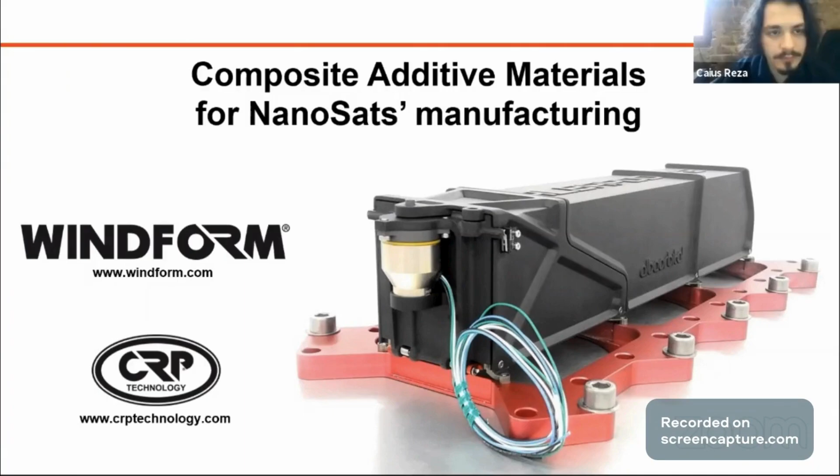We've been working, I would say almost 1 year, with them in order to develop the AlbaPod, and it's been a really cool experience. A lot of things we've learned from both of our companies and from this product. You can see this really cool picture about the AlbaPod when it was on the testing phase.

Let me present my company. The company is CRP, a group of companies made of 4 different companies which do complementary things, except for Energica which you'll see last. CRP Meccanica is a company specialized in precision CNC machining, doing really good work on aluminum and titanium parts, with more than 50 years of experience in this field.

Then we have CRP Technology, which has 25 years of experience in 3D printing, especially SLS technology, with their own materials called Windform. CRP USA is a sister company of CRP Technology, based in the US to serve the North American market. And finally, there's a spin-off from our background in motorsports and motorcycles.

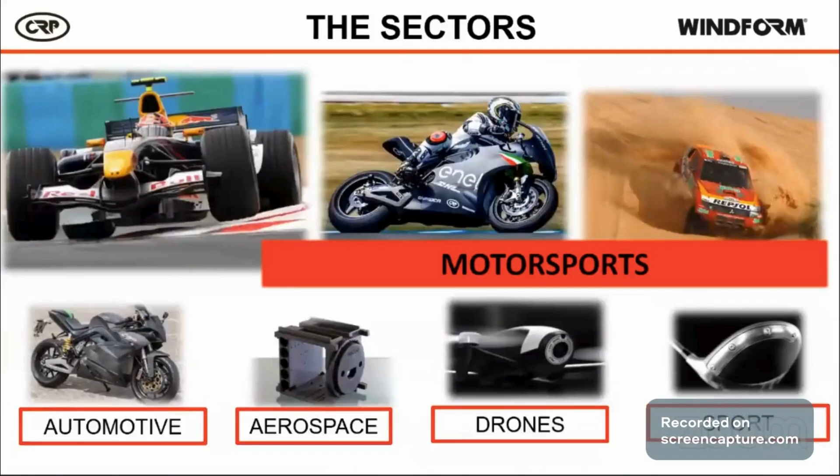The industries we work in mainly are motorsports, but as some might say, a Formula One car is just a plane upside down. So that's our link with aerospace, especially with planes, and then with satellites and everything that flies.

So it's a very near expertise that we've developed in motorsport that we can apply also in aerospace.

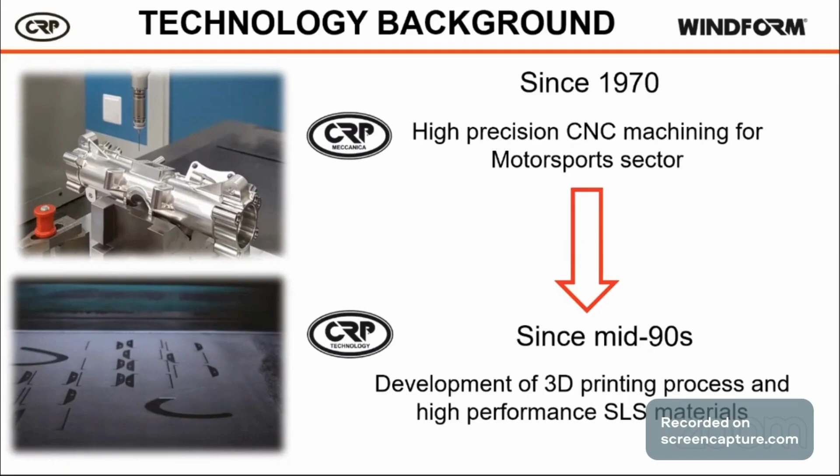Our background: we started in the 1970s with high precision CNC machining for the motorsports industry. In the mid 90s, we bought the first SLS machine in Italy at the same time as Fiat Centro Ricerche, and we started developing not only 3D printed parts, but also working on how to improve the materials that were actually in the market at that time, and started developing our own range of materials.

It was only in 2005 when we developed this line of materials, this family called Windform, especially Windform XT, which is a carbon fiber reinforced polyamide, a really, really good material for structural applications.

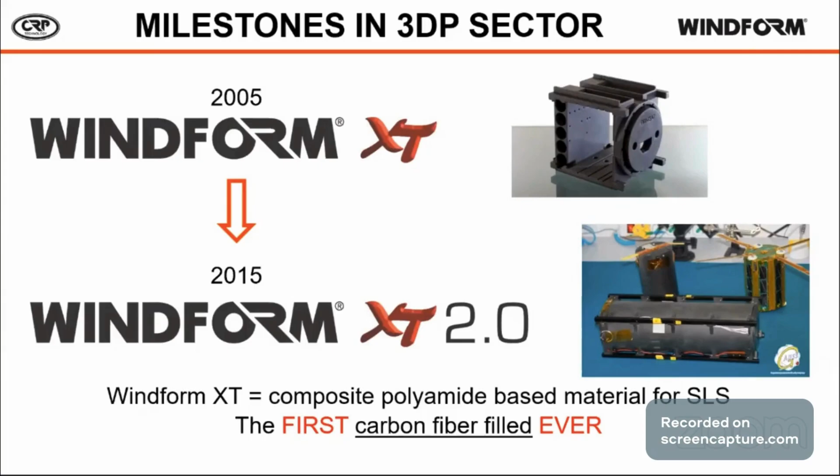In 2015, we updated our Windform material with higher strength and higher rigidity in order to improve the applications we were already working with. It's considered that XT was the first carbon fiber material for SLS technology ever developed.

We started doing rapid prototyping for the wind tunnel. Now with the improvement of 3D printing and the materials, we don't say anymore that we're doing rapid prototyping, but we are doing additive manufacturing, which is a whole new technology to do functional parts, not just parts that can be kind of what you expect from traditional technologies, but fully functional parts.

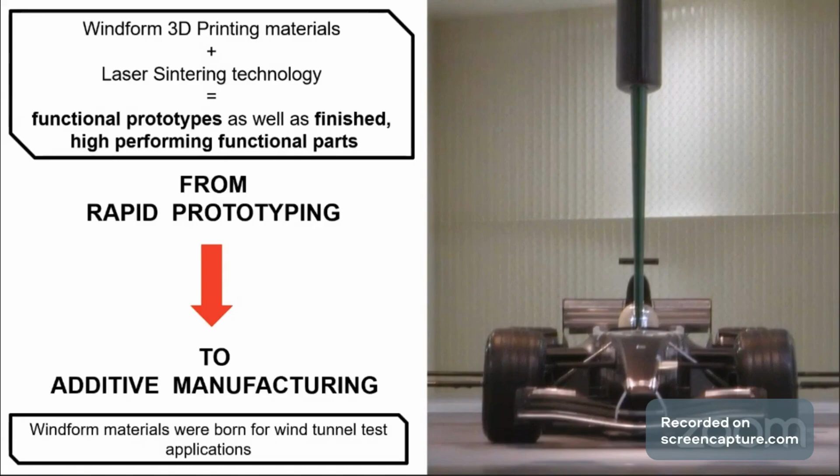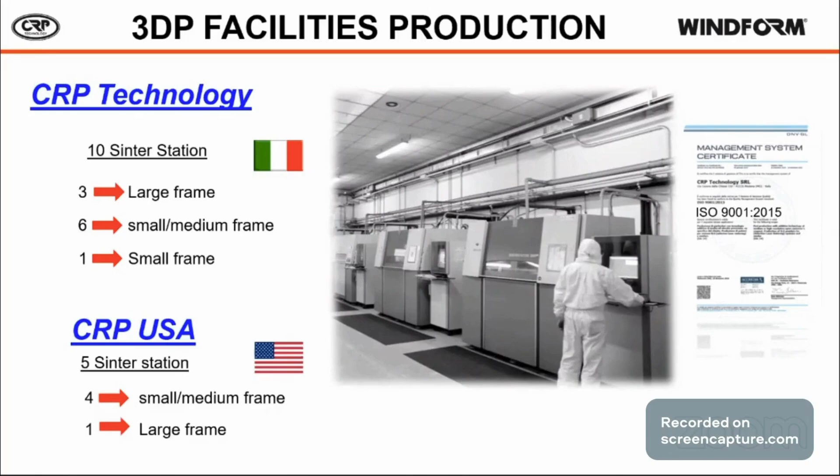I'm going to give you just a brief presentation about these materials. You can find everything else I'm not telling you on windform.com, which is our website. You can download all the data sheets, some testing we have done, and some certifications from NASA and ESA for outgassing as well.

Just to tell you, this is our top-line materials. Windform XT 2.0 is our most rigid material. Just to give you some ideas, it's a very low density material. The HDT, heat deflection temperature, is around 173 degrees. The tensile strength on the x-axis of this material is around 84 megapascal, and it has a low elongation of almost 4%. On the other side, we have Windform SP.

It's kind of the same as Windform XT. It's the polyamide that changes and gives a bit more elasticity, so you can see the elongation to break increases. This elasticity also gives more isotropy to the material, which is something 3D printed parts have issues with. Also, the temperature this material receives without losing mechanical performance is a bit higher.

It's around 186 degrees. On the right side you have our top-line glass-filled materials, Windform GT, which, different to the carbon fiber materials, have reduced mechanical properties but advantages like non-conductiveness, and these materials also perform very well mechanically. The tensile strength for GT is 56 megapascal on the x-axis, and 60 megapascal for Windform LX on the x-axis.

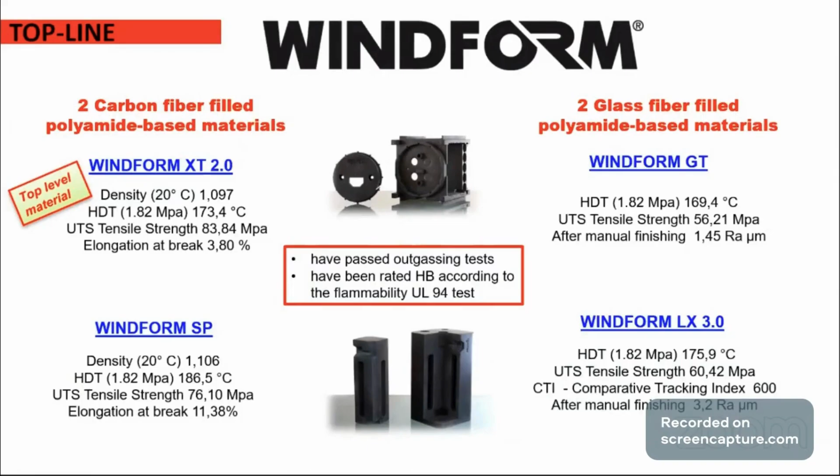Also, the finishing of these materials, as you can see in the pictures I'll present further on, is very, very smooth thanks to a manual finishing we've developed on our own, giving a very aesthetic finish. We've also developed a line of flame retardant materials: Windform FR1, a carbon filled material, and

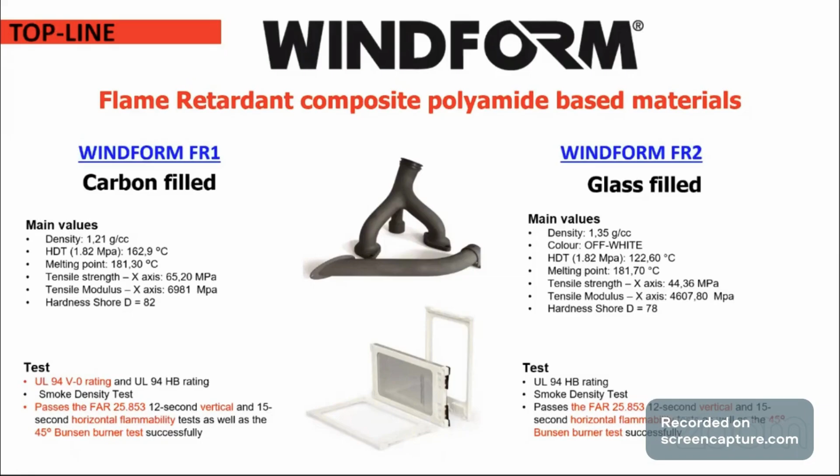Windform FR2, which is a glass filled material. I'm going a bit fast over this part because you can find all this information on our Windform website. Why use Windform? Because it's the first carbon fiber filled SLS material ever. It's the best tensile strength material per unit in the market, and it has high resistance to temperatures.

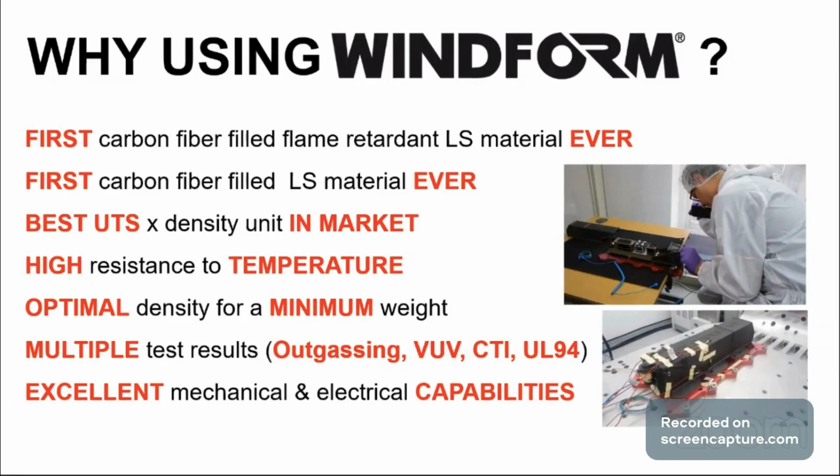A very important thing is that we have developed lots of certifications. As I was saying before, we have NASA and ESA approval for outgassing, and we have done several launches with different satellites and satellite components manufactured with our materials.

This is what we developed with Alba Orbital, the AlbaPod. This is the case and the ejection door, which was a very tricky component we printed with a very thin surface in order to drastically reduce the weight of the part.

Also, as you can see, we developed a version for a space qualified PocketQube deployer. It was done using our laser sintering technology and our Windform XT II material. You can see some pictures of the mounting of the AlbaPod from Alba Orbital guys. You can find the full case study on our website.

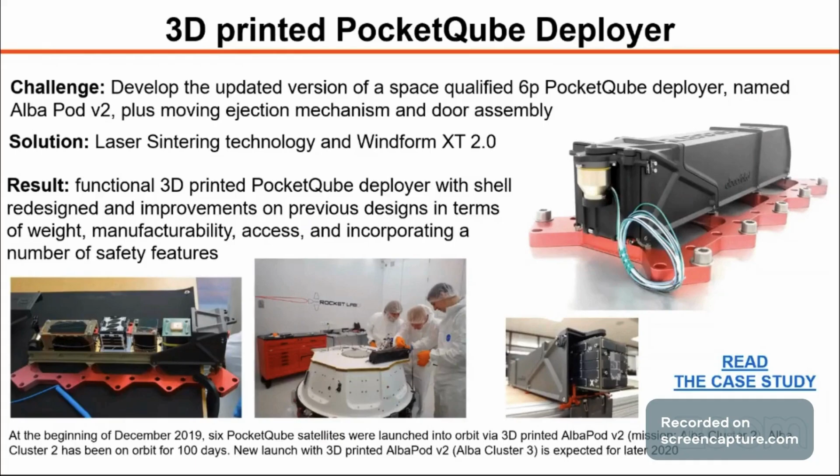This is another case study on a 1P PocketQube, completely developed using our laser sintering technology and Windform XT 2.0. It was a PocketQube that contained the electronics of a camera and a radio system.

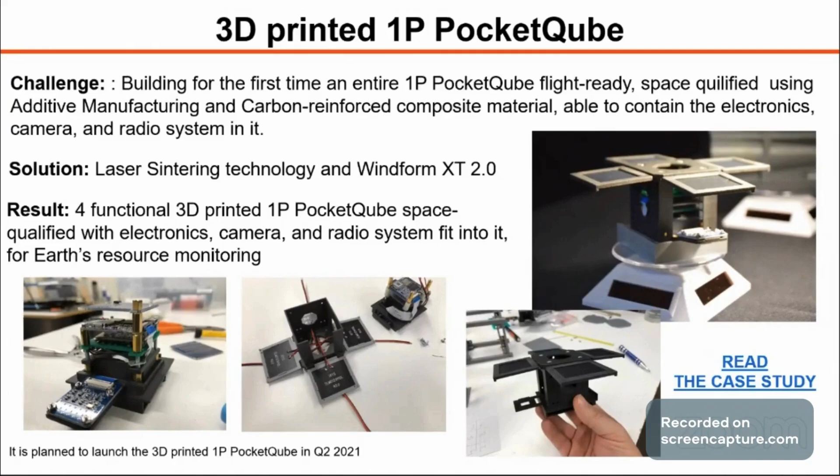This is also a CubeSat form factor. It was developed for the LISA project at Créteil University in Paris. It was a very complex structure in order to reduce the weight and to perform as well as the aluminum structure they had developed in the first prototype.

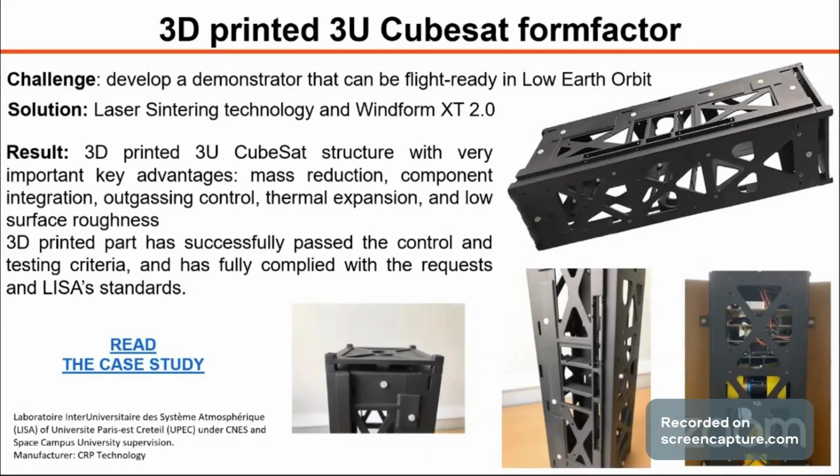These are some case studies from previous projects. This is the TuPOD, which was also a pod for different satellites, different CubeSats. It served as a single structure and also as a support structure for all the electronics and devices attached to the structure.

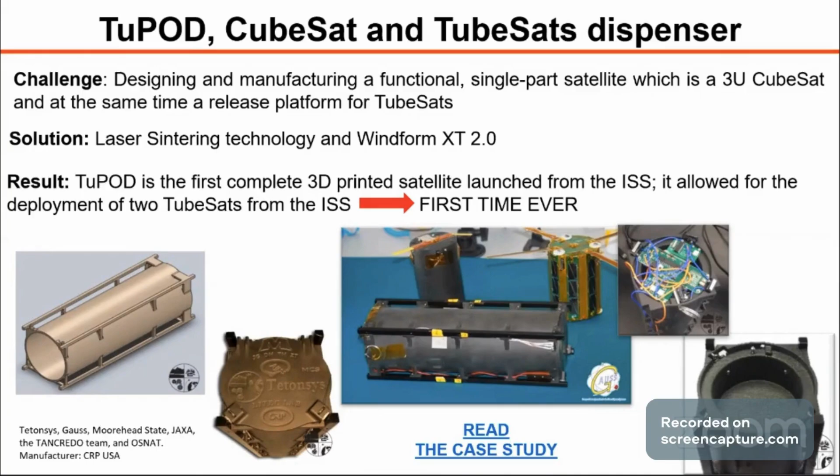It was launched from the International Space Station directly. Instead, this is the KySat-2. It was the first CubeSat we developed, made with the University of Kentucky and Morehead State University. It was used to launch optics to take pictures of the Earth.